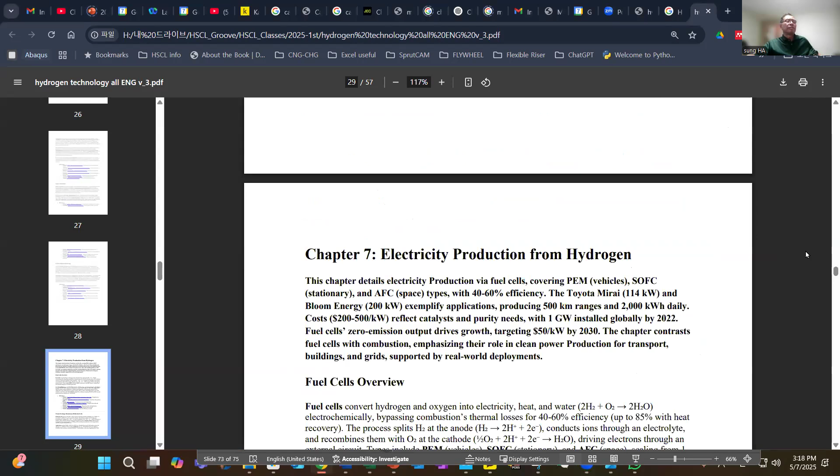Chapter 7 here, we actually list some key points: electricity production from hydrogen. As you can see here—oops, I'm sorry, I didn't share my screen. So chapter 7, electricity production from hydrogen—this is the topic we're gonna cover.

This chapter details electricity production via fuel cells. There can be several different types of fuel cells with different efficiencies. The Toyota Mirai has a fuel cell with a power of 114 kilowatts, among some examples, and cost is important.

And the fuel cell overview: basically there will be a conversion where hydrogen is combined with oxygen, and these are turned into electricity and a little bit of heat and water. Water is the output, along with H2 and O2, and electrochemically there are electrons that come out from this system.

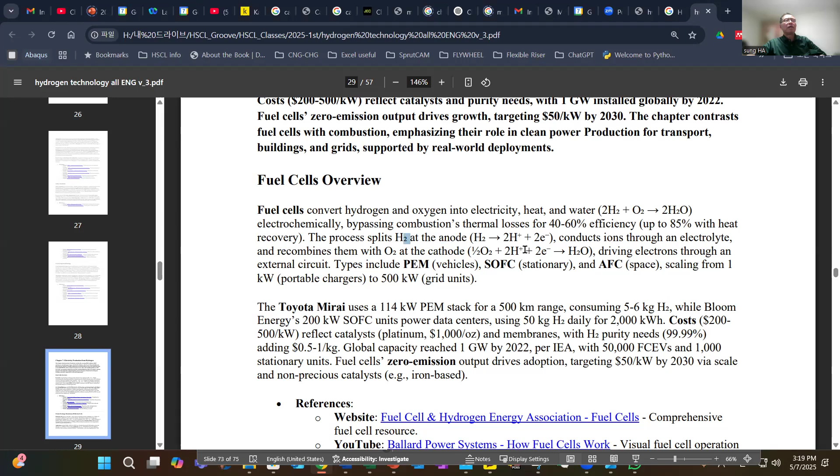What's happening is that in the anode—like in a battery or fuel cell, we always have an anode side and a cathode side—at the anode, H2 splits into 2 H-plus and 2 electrons, and conducts ions through the electrolyte. These two H-plus ions go through the electrolyte and through a membrane, then recombine with O2 at the cathode side. Then water comes out, and the two electrons go through some circuit, giving us energy as electricity.

So there could be different types, like PEM, SOFC, and AFC, but PEM is the most well-known type.

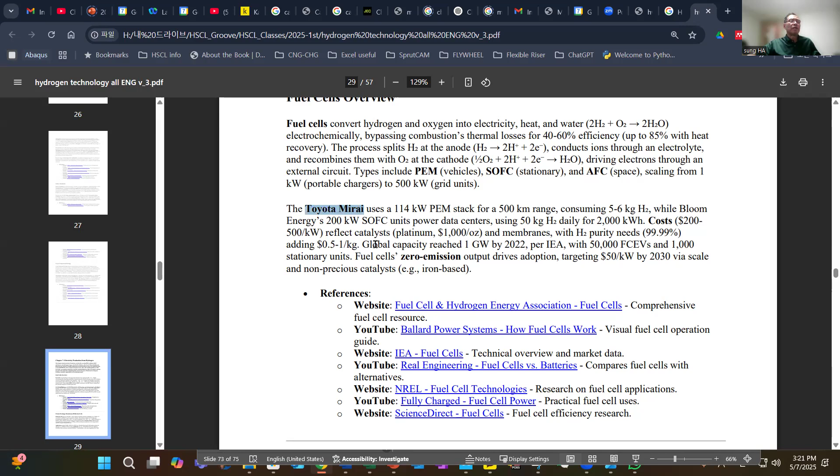Okay, well, there are some numbers which characterize the fuel cell of Toyota Mirai. The Toyota Mirai and Hyundai Nexo are the two most well-known fuel cell vehicles, so there are some good references.

So PEM, proton exchange membrane. A PEM fuel cell operates at not much high temperature, using a proton-conductive polymer membrane to shuttle H plus ions from anode to cathode with a platinum catalyst. This is important, the platinum catalyst. Without this, it's very difficult to split H2 into protons. The H2 needs to be accelerated in oxidation, and the O2 and H2 give us water.

And there's always an efficiency factor with current technology. The efficiency of current technology is about 40 to 60%. The efficiency is reaching higher and higher, but this is the reality right now.

And also, Hyundai has some fuel cell vehicles. Again, the driving range is important, about 600 kilometers or 700 kilometers. That's the one.

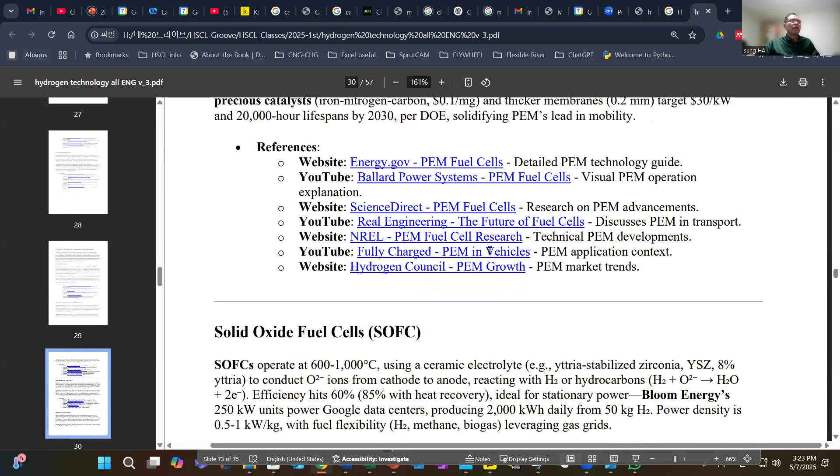Yeah, some numbers and explanations, and we need to understand this by going through some websites and YouTube. So today, let's watch some videos together, and then let's discuss.

I collected some hydrogen fuel cell YouTube videos.

Okay, well, there are already very good YouTube videos describing proton exchange membrane hydrogen fuel cells, electrochemical devices. Well, it's important to understand electrochemical device reactions. We're mostly mechanical engineers, but now we need to be well-trained, multidisciplinary, to understand a little bit about electrical and a little bit about chemical engineering.

This is critical to understand all kinds of energy. Energy conversion is mainly through electrochemical reactions, like a battery, which is also an electrochemical device. Anyhow, it combines hydrogen and oxygen to produce electricity with water and heat as byproducts. As you can see, water and heat are byproducts.

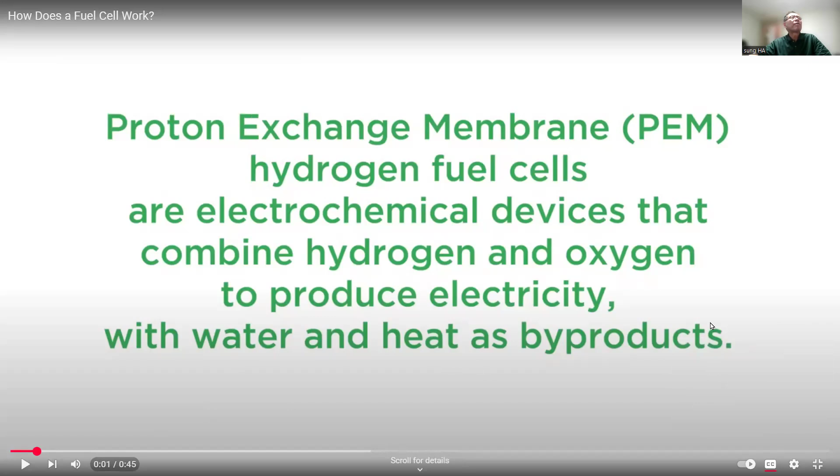We can turn the captions on. This is a very short video, but we have many different types of videos. As you can see, here is the H2 supply. As I just mentioned, there's a catalyst, platinum, which is very expensive. Then there's a proton exchange membrane, PEM, and then another catalyst. The H2 will split into H plus and electron and goes like this. We watched this video several times, but we cannot emphasize enough how important it is to understand these systems.

As you can see, hydrogen enters and is split, okay? This is split into protons and electrons. The electrons are shown in red color, and the proton is blue. They are split basically - that's what's happening on the anode side. And for this separation, again, the catalyst plays the most important role. There are a lot of researches going on to find effective catalysts instead of the expensive platinum. So once this is separated, it goes through the proton exchange membrane, PEM.

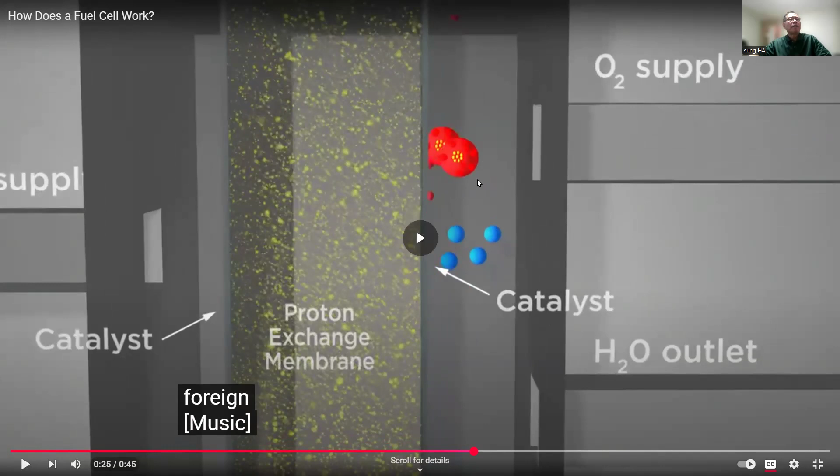So actually this is H plus, and then there's oxygen. Oxygen is just from the air, so it costs nothing. So basically the H plus and O2 combine. Okay, so what it does: H2 supply hydrogen from a hydrogen tank, and the catalyst splits the electron and the proton. So the electron now goes through and generates electricity, giving us energy. As you can see, the electron travels, and there is some heat generated - that's not avoidable, again affecting the efficiency. Then H2O finally will be a byproduct, H2O comes out.

So we always need to visualize this in mind - what's happening with the H2 in and H2O water comes out. This is the anode side and cathode side. Again, as you can see, this is the H plus proton traveling and meeting with the O2, giving us water. I'm repeating the behavior, but okay, this is how the fuel cell works. Very short video, but please keep that in mind, and we need to visualize that.

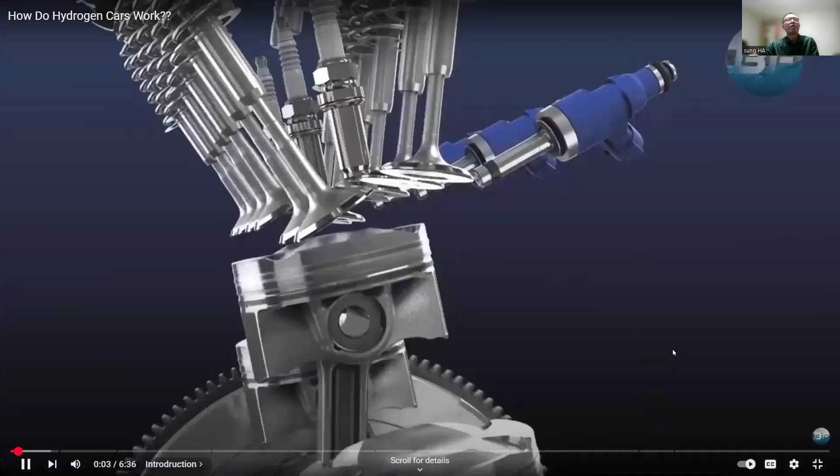Let's watch together: the function of a hydrogen vehicle. Have you ever wondered what powers a hydrogen vehicle and how it differs from traditional gasoline cars? In this video, we'll take a closer look at the different components that make up a hydrogen vehicle and how they work together to power the car. We will also discuss the benefits of hydrogen vehicles, such as their energy efficiency and environmental friendliness, as well as the problems that still need to be solved before they can be used widely.

First, let's take a deeper look into the differences between hydrogen cars using electric motors and combustion engines. Both types of vehicles use hydrogen as fuel, but the way they convert that fuel into power is different. A hydrogen car using an electric motor is known as a fuel cell electric vehicle, also called FCEV. In this type of vehicle, hydrogen gas is fed into the fuel cell stack, where it undergoes a chemical reaction with oxygen from the air to produce electricity.

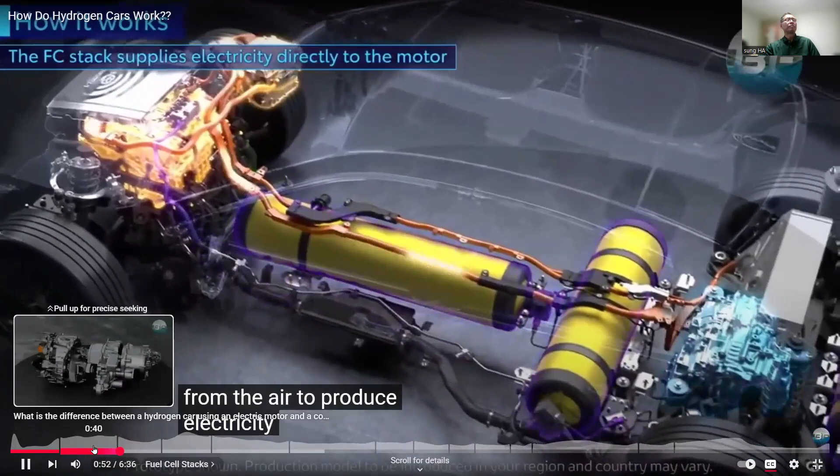Now this is the fuel cell, which we just reviewed what's going on inside. Actually, the H2 goes in there, and the O2 oxygen comes in together, and then some water comes out. Then electricity is generated, which is used to run the motor. It's fed into the fuel cell stack, where it undergoes a chemical reaction with oxygen in the air to produce electricity.

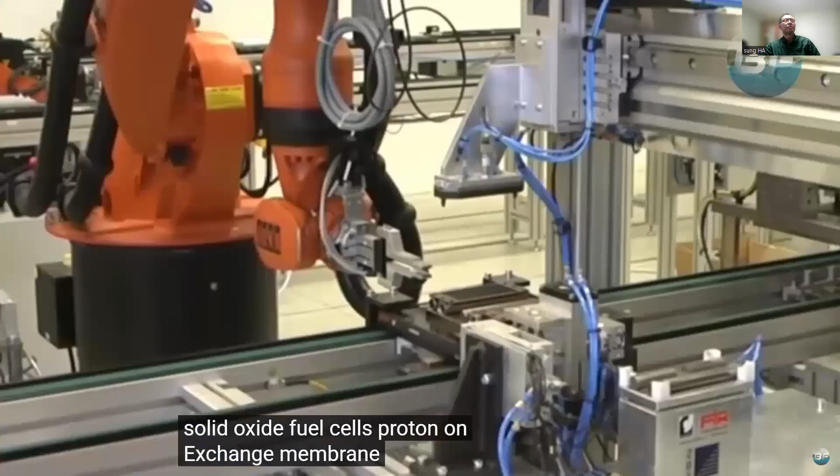There are a few types of fuel cell stacks. The most common ones are proton exchange membrane and solid oxide fuel cells. Proton exchange membrane fuel cells are typically used in cars because they can start up quickly and operate at low temperatures. Solid oxide fuel cells, on the other hand, are better suited for stationary power generation because they require high temperatures and operate efficiently. A fuel cell stack consists of multiple fuel cells which are stacked together.

Now this is the real stacked fuel cell. We just watched the one cell to understand what's going on, but this is a real one. So rather than a large thin layer, we stack them to have space efficiency.

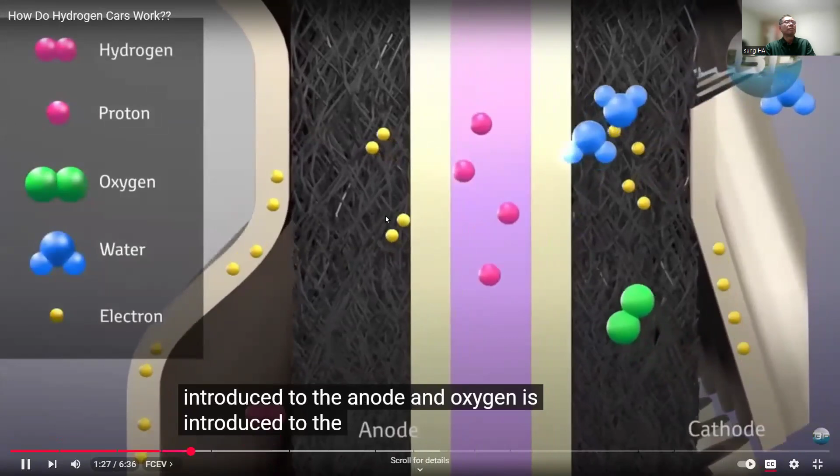Then the operation principle is basically the same as the one cell, just scaled up to increase the power together to increase the amount of electricity produced. Each fuel cell contains an anode, cathode, and an electrolyte. When hydrogen gas is introduced to the anode and oxygen is introduced to the cathode, a chemical reaction occurs, producing electricity. Electricity powers an electric motor that drives the car's wheels, with water being the only byproduct of the reaction.

A hydrogen car using a combustion engine is called a hydrogen internal combustion engine vehicle. In this type of vehicle, hydrogen gas is fed into an engine where it is mixed with air and ignited. The resulting explosion drives a piston, which turns a crankshaft and powers the car.

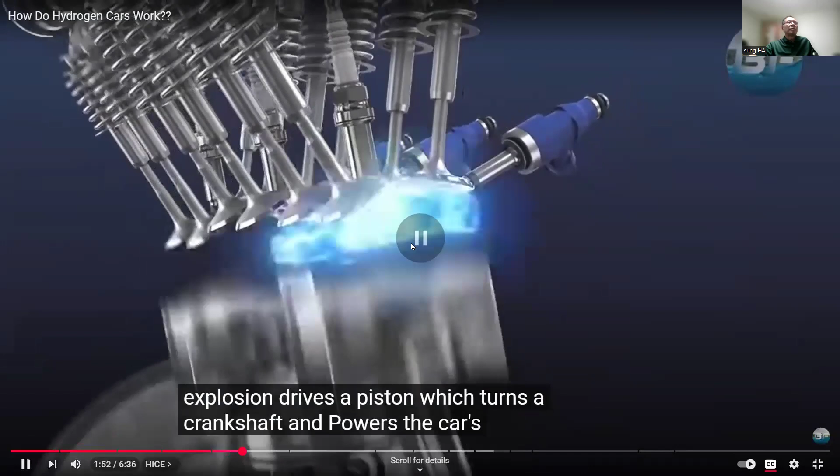Okay, this is a different explanation. As I mentioned, this is the hydrogen combustion engine, using hydrogen as a fuel similar to gasoline, because hydrogen gas itself can be flammable, so it can explode. This is just an internal combustion engine - instead of using gasoline, we can use hydrogen.

In this way, the biggest advantage is that we don't need any extra fuel cell system - we can use the existing conventional combustion engine. This combustion engine is, in principle, very similar to a conventional one, but with a little bit of minor modification. This technology is really led by Toyota - Toyota is developing this hydrogen combustion engine system.

However, hydrogen internal combustion engines emit pollutants such as nitrogen oxides and particulate matter, similar to gasoline-powered engines. Oh, and this hydrogen combustion engine produces byproducts; it generates not only water but also particulate matter, similar to gasoline-powered engines.

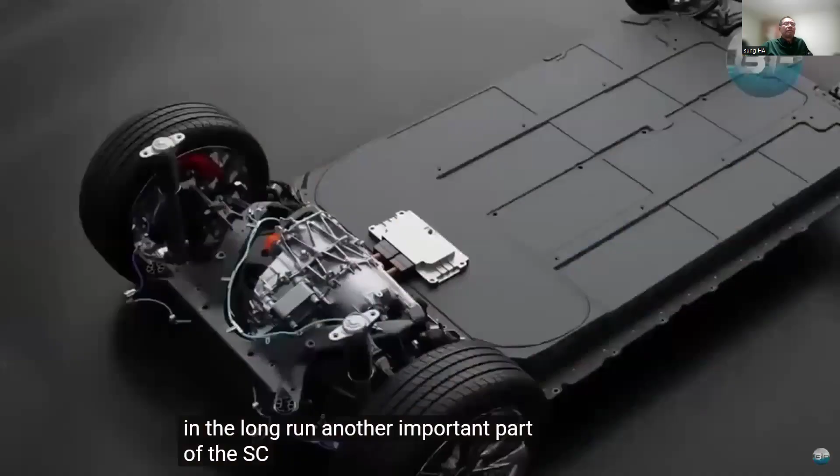However, fuel cell electric vehicles have an efficiency of 60%, which is 2 times higher than the efficiency of the combustion version. This means that fuel cell EVs require less hydrogen to travel the same distance, making them more cost-effective in the long run. Another important part of the FCEV is the electric motor. This is what converts the electricity produced by the fuel cell stack into mechanical energy that moves the car.

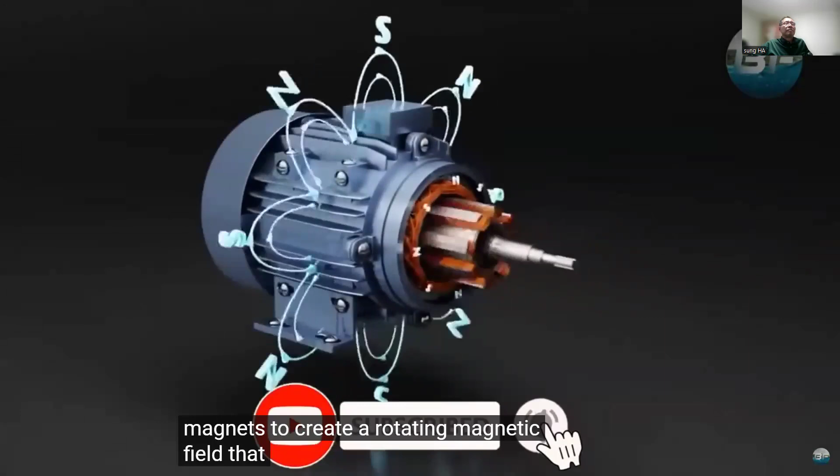There are 2 main types of electric motors used in fuel cell vehicles: the AC synchronous motor and the DC brushless motor. The main difference between these 2 types of motors is in the way they operate. The AC synchronous motor uses a set of magnets to create a rotating magnetic field that interacts with a set of coils to generate torque and turn the motor. The DC brushless motor, on the other hand, uses electronic commutation to switch the direction of the magnetic field and keep the motor turning. This makes the DC brushless motor more efficient than the AC synchronous motor, but also more complex to design and manufacture.

Next, we have the hydrogen storage tank. There are 2 main types of hydrogen storage tanks: compressed gas tanks and cryogenic liquid tanks. Compressed gas tanks are made of high-strength materials and are pressurized to store hydrogen gas. Cryogenic liquid tanks, on the other hand, store hydrogen as a liquid at extremely low temperatures.

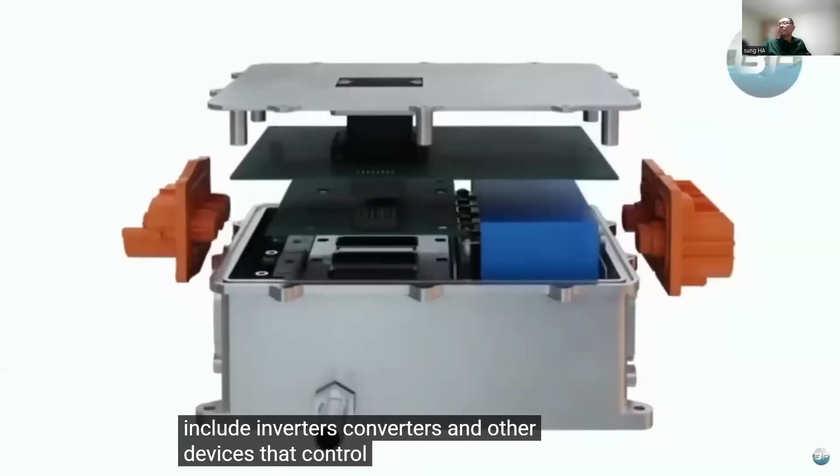Further components of a hydrogen vehicle are the power electronics, which manage the flow of electricity between the fuel cell stack and the electric motor. These electronics include inverters, converters, and other devices that control the voltage and current to ensure that the electric motor receives the right amount of power to operate efficiently. In addition, there is a cooling system that helps regulate the temperature of the fuel cell stack and other components. The cooling system uses a combination of air and water to maintain a safe operating temperature and prevent overheating.

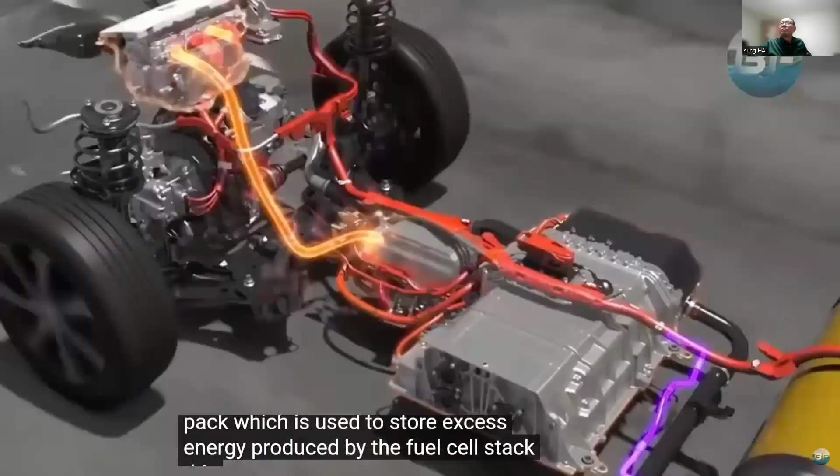Hydrogen vehicles also have a battery pack, which is used to store excess energy produced by the fuel cell stack. This excess energy can be used to power the electric motor during periods of high demand or to start the car in cold weather when the fuel cell stack may need additional time to warm up. Finally, the hydrogen vehicle has a number of safety features, including pressure relief devices and sensors that detect leaks or other potential hazards.

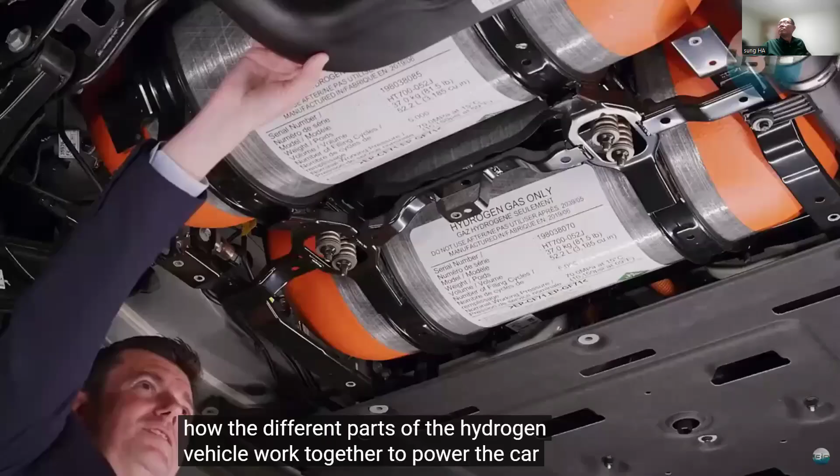Now let's take a closer look at how the different parts of the hydrogen vehicle work together to power the car. When the driver presses the accelerator pedal, the hydrogen gas is released from the tank and flows through a regulator valve, which controls the amount of hydrogen that is supplied to the fuel cell stack. In the fuel cell stack, the hydrogen gas is combined with oxygen from the air to produce electricity through a chemical reaction. The chemical reaction occurs at the anode of the fuel cell, where hydrogen molecules are split into positively charged hydrogen ions and negatively charged electrons.

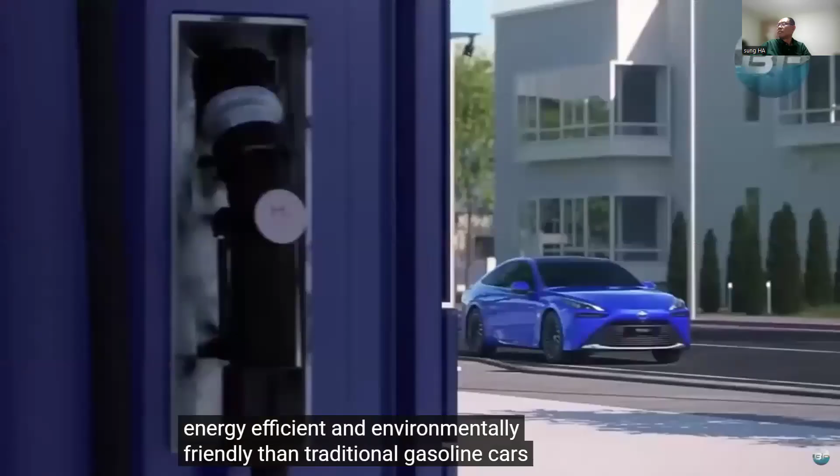The electricity generated from this chemical reaction is then sent to the electric motor, which converts the electricity into mechanical energy that powers the car's wheels. As the car moves, the only emission produced by the FCEV, as we said before, is water vapor, which is released from the tailpipe. This means that hydrogen-powered cars are not only more energy efficient and environmentally friendly than traditional gasoline cars, but they are also much quieter and produce less vibration.

One of the main concerns about hydrogen-powered vehicles is the cost of hydrogen fuel. Currently, producing hydrogen is more expensive than producing gasoline and diesel fuel. However, the cost of hydrogen is expected to decrease as more production facilities are built and economies of scale are achieved. There are also three types of hydrogen, which can affect the cost.

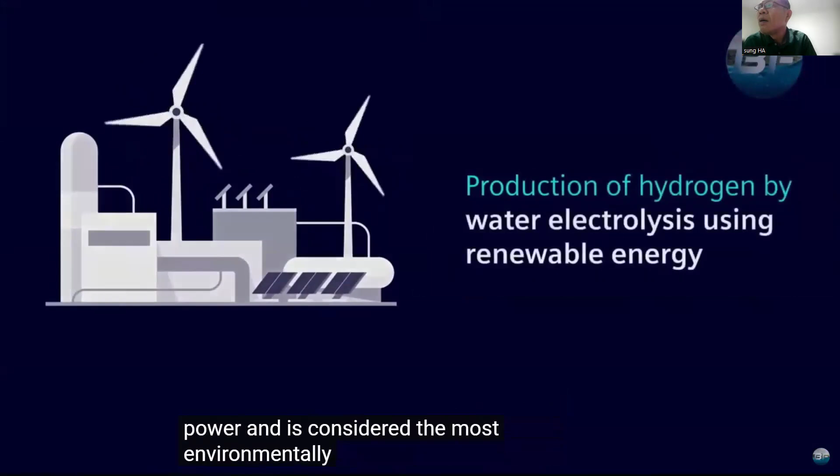Green hydrogen is produced using renewable energy sources, such as solar power, and is considered the most environmentally friendly choice. Blue hydrogen is produced using fossil fuels, with carbon emissions captured and stored, making it a cleaner alternative. Gray hydrogen is produced from natural gas through a process called steam methane reforming, which results in carbon dioxide emissions being released into the atmosphere. It is currently the most common method of hydrogen production and is also less expensive than green hydrogen.

In conclusion, hydrogen vehicles are a promising alternative to traditional gasoline-powered cars. The fuel cell stack, hydrogen storage tank, and electric motor work together to produce an energy-efficient and environmentally friendly mode of transportation. As we continue to move towards more sustainable and eco-friendly forms of transportation, hydrogen vehicles present a promising alternative that can help reduce our carbon footprint and create a more sustainable future.

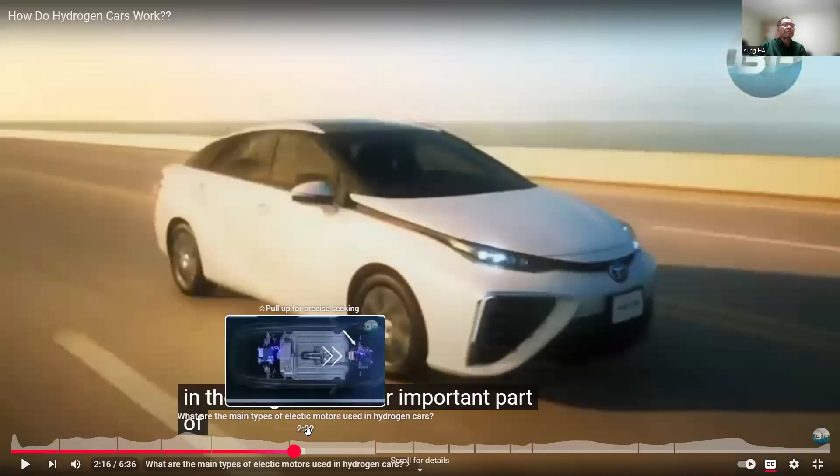Well, together with this fuel cell, which generates electricity, the next component is a motor. The motor is the real actuator to rotate the wheels and move the vehicle. Now, one of the main reasons why the EV, electric vehicle, got so popular is not just because of battery technology, but also

motor technology. So it is very critical to understand, not in detail, but basically how this motor system works. And here, this video introduces a little bit about the BLDC and also some other synchronous motor. Okay, let's go through.

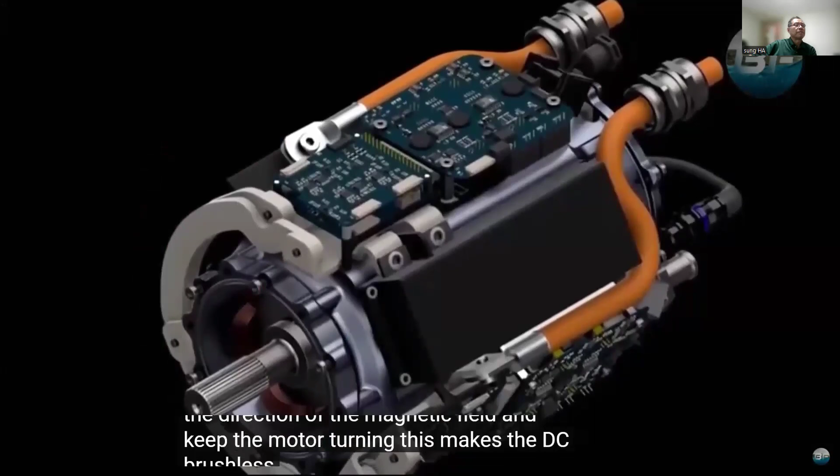Now this is the AC synchronous motor. Actually, this is a rotor and this is a stationary part, mostly consisting of the coils here. So basically, the most key point is the rotating part, which consists of permanent magnets. You know, recently the permanent magnet technology, material-wise, has improved a lot.

And one issue, still a big issue, is that this heavy magnet has to rotate at very high speed, like 2000 and 3000. Imagine this heavy magnet rotating. What will happen? Well, a lot of high centrifugal forces will be exerted on this magnet. And outside, as you can see, we have stationary coils. So to work as designed, one most critical point is to keep this heavy magnet in place. That is what we need.

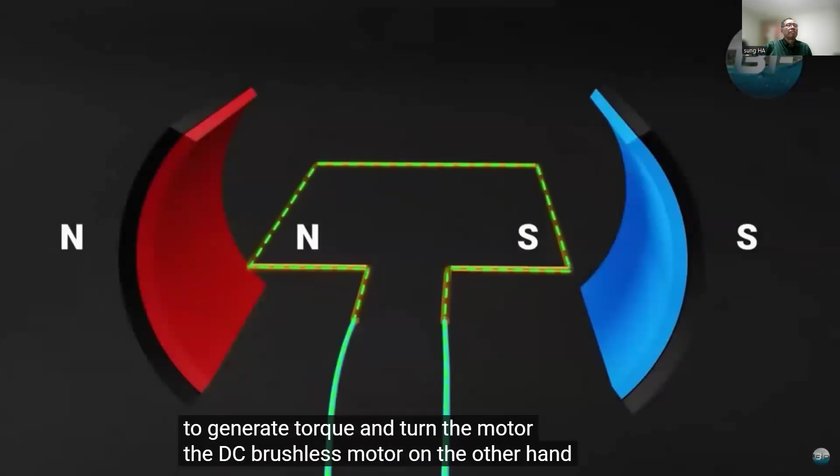Yes, with this brushless BLDC motor, efficiency-wise it could be higher, but this synchronous motor's efficiency is still over 90%, which is really a breakthrough, which makes these electric vehicles possible together with the battery. Now, even for hydrogen vehicles, we basically generate electricity from a fuel cell, and we still need to use this electric motor. So we pay attention to the technology of this electric motor.

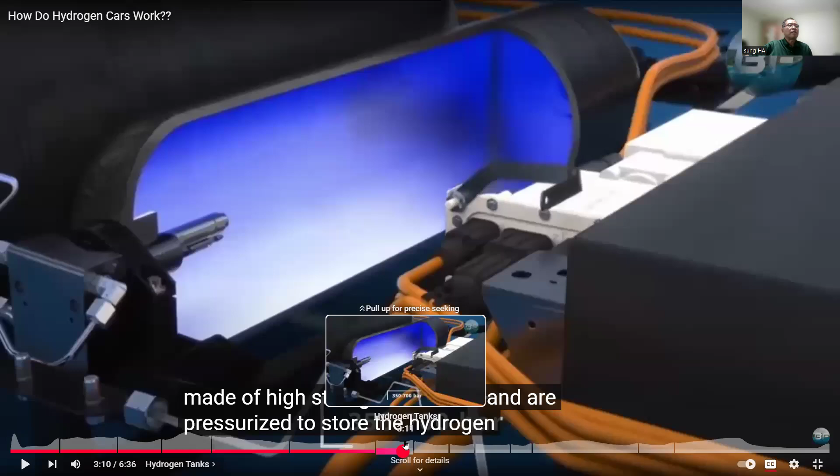So anyhow, what they are saying is that they get the hydrogen from the hydrogen tank, then the fuel cell, and the electricity goes into the motor. And as we already discussed, instead of high pressure gas, they could use very low temperature liquid hydrogen. But as we know, to keep hydrogen as a liquid, the temperature has to be really low, minus 253. That requires a lot of energy.

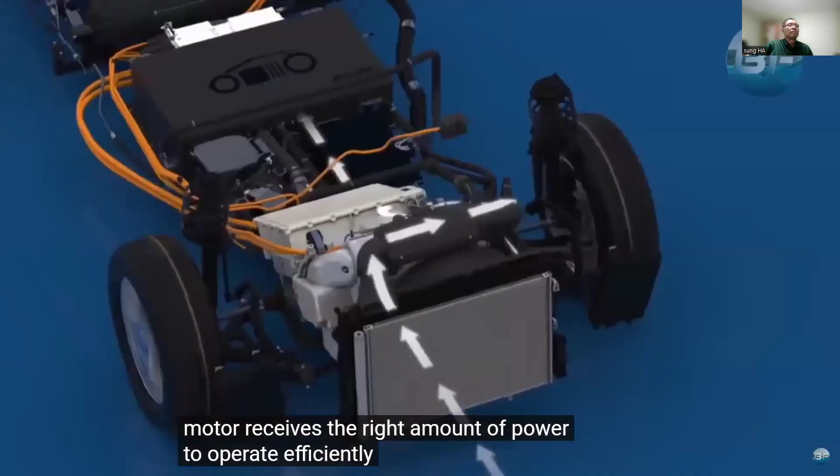Further components of a hydrogen vehicle are the power electronics, which manage the flow of electricity between the fuel cell stack and the electric motor. These electronics include inverters, converters, and other devices that control the voltage and current to ensure that the electric motor receives the right amount of power to operate efficiently. In addition, there is a cooling system that helps regulate the temperature of the fuel cell stack and other components. The cooling system uses a combination of air and water to maintain a safe temperature.

The cooling system is one of the key systems, in addition to the operation of the main system, like the fuel cell. From the fuel cell, of course, we get the electricity back, but there could be a lot of heat.

So we need heat management systems, a water cooling system, or just the free air cooling system as well, to maintain operating temperature and prevent overheating.

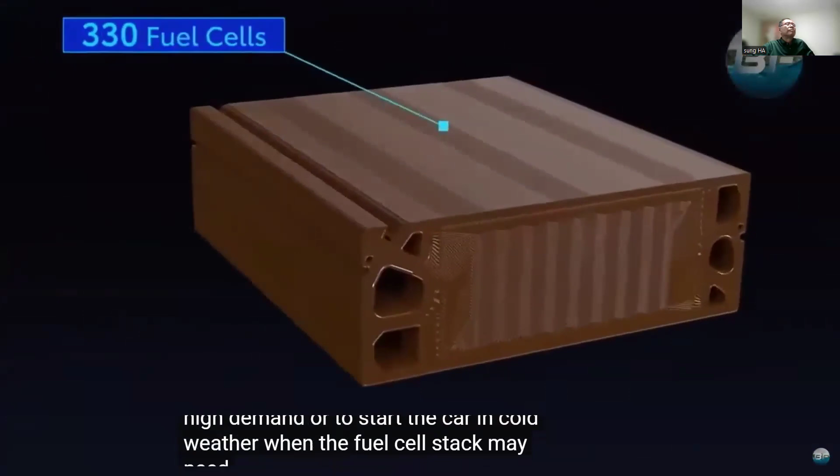Hydrogen vehicles also have a battery pack, which is used to store excess energy generated by the fuel cell. Oh, don't get confused. Even a hydrogen car needs a little bit of backup: the battery. Not as big as in a real electric vehicle, but a hydrogen car also needs a little bit of battery, which can play an important role. This excess energy can be used to power the electric motor during periods of high demand, or to start the car in cold weather when the fuel cell stack may need additional time to warm up.

Finally, the hydrogen vehicle has a number of safety features, including pressure relief devices and sensors that detect leaks or other potential hazards. Now let's take a closer look at how the different parts of the hydrogen vehicle work together to power the car. When the driver presses the accelerator pedal, the hydrogen gas is released from the tank and flows through a regulator valve, which controls the amount of hydrogen that is supplied to the fuel cell stack.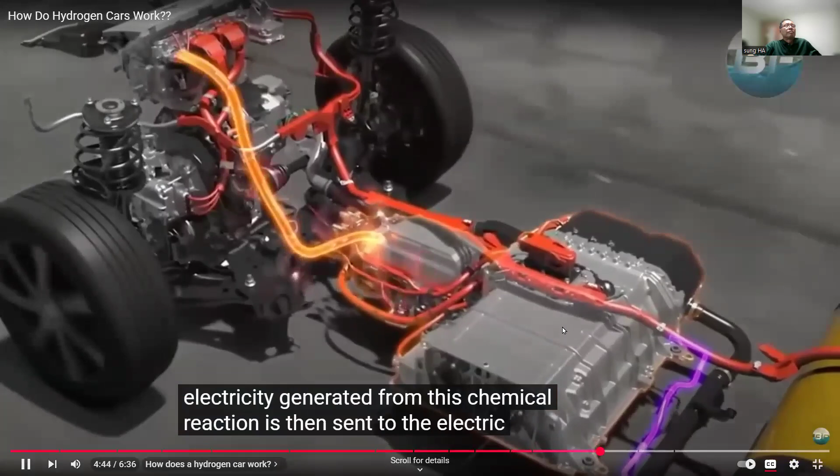In the fuel cell stack, the hydrogen gas is combined with oxygen from the air to produce electricity through a chemical reaction. The chemical reaction occurs at the anode of the fuel cell. Hydrogen molecules are split into positively charged hydrogen ions and negatively charged electrons. The electricity generated from this chemical reaction is then sent to the electric motor, which converts the electricity into mechanical energy that powers the car's wheels.

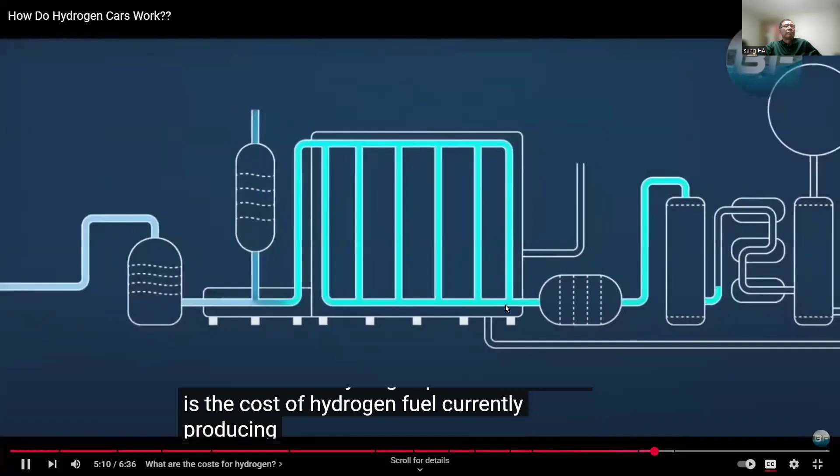As the car moves, the only emission produced by the FCV, as we said before, is water vapor, which is released from the tailpipe. This means that hydrogen-powered cars are not only more energy efficient and environmentally friendly than traditional gasoline cars, but they are also much quieter and produce less vibration. One of the main concerns about hydrogen-powered vehicles is the cost of hydrogen fuel. Currently, producing hydrogen is more expensive than producing gasoline or diesel fuel. However, the cost of hydrogen is expected to decrease as more production facilities are built and economies of scale are achieved. There are also three types of hydrogen, which can affect the cost.

Green hydrogen is produced using renewable energy sources, such as solar power, and is considered the most environmentally friendly choice. Blue hydrogen is produced using fossil fuels, but the carbon emissions are captured and stored, making it a cleaner alternative. Gray hydrogen is produced from natural gas through a process called steam methane reforming, which results in carbon dioxide emissions being released into the atmosphere. It is currently the most common method of hydrogen production and is also less expensive than green hydrogen.

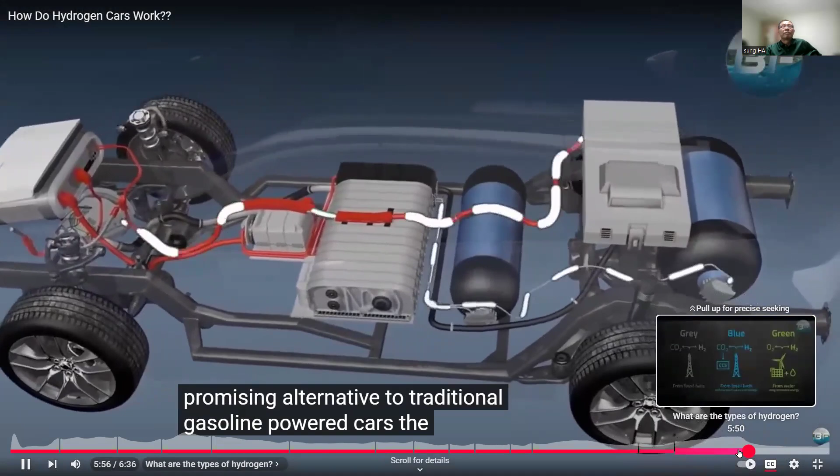In conclusion, hydrogen vehicles are a promising alternative to traditional gasoline-powered cars. The fuel cell stack, hydrogen storage tank, and electric motor work together to produce an energy-efficient and environmentally friendly mode of transportation. However, as we continue to move towards more sustainable and eco-friendly forms of transportation, hydrogen vehicles present a promising alternative that can help reduce our carbon footprint and create a more sustainable future.

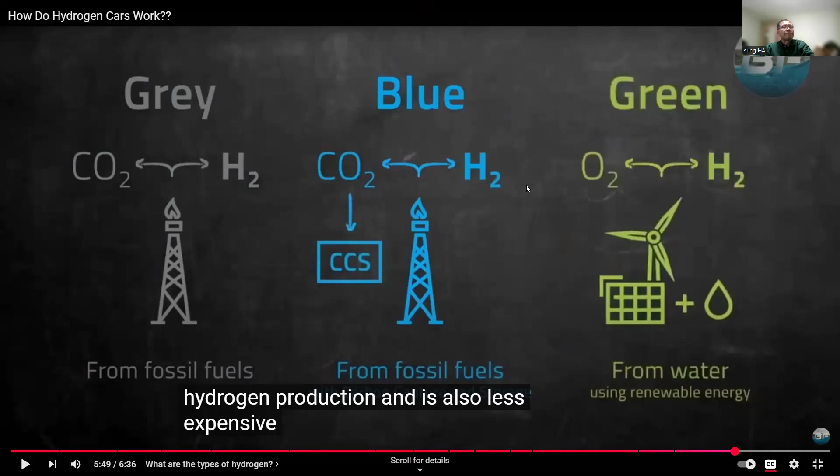So this is not so environmentally friendly. So basically, there are other colors like white and gold. And pink: pink is the electricity generated from nuclear power. There are so many colors, but basically it's important to understand these three most important ones. And so through this course, we'd like to get reminded of all the technology related to hydrogen. This hydrogen technology does not stand alone. They are placed all together.

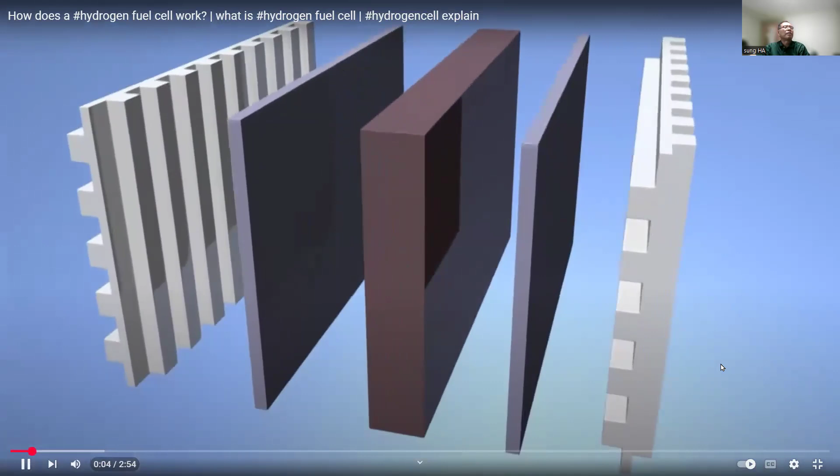Basically the PEM, but it is quite worthwhile to watch different videos and see this. It can be used for a wide range of applications, like transportation, material handling, backup power applications, etc. The conventional combustion-based technologies are presently used in vehicles and power plants. It is an opportunity for the fuel cell to provide its benefits.

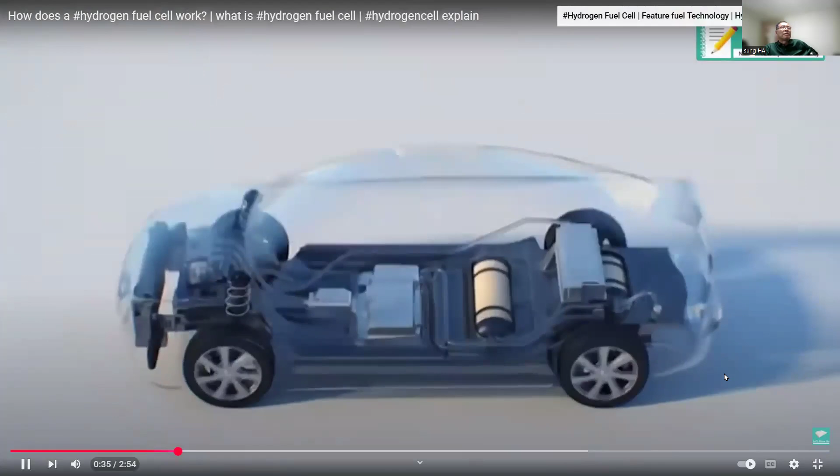Hydrogen is used to power fuel cell electric vehicles, FCEVs. It offers more efficiency over conventional engine vehicles as it produces no tailpipe emissions, but only emits warm air and water vapor. Let's learn how a hydrogen fuel cell works. Do you know how a battery works? Yes, fuel cells work like batteries, but they do not run down or need recharging. They can produce electricity constantly.

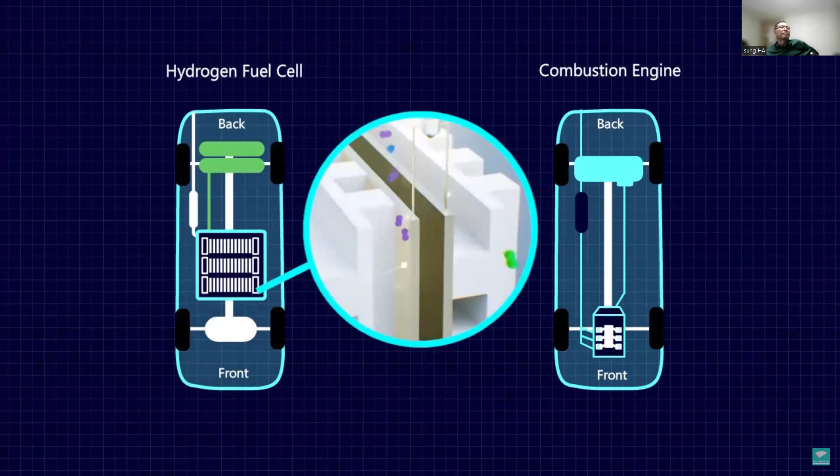Fuel cells operate at higher efficiencies than combustion engines, and they convert the chemical energy from the fuel to electrical energy. A fuel cell is composed of two plates separated by an electrolyte membrane. One plate is called the anode and the other is the cathode. Hydrogen is passed through the anode while oxygen is passed through the cathode.

Yeah, sometimes it's a confusing explanation, but again, the H2 comes into the anode side. Okay, this is the cathode side, where the H2, H+ and O2 combine, giving us the water. Okay, so this is the anode and cathode. At the anode, hydrogen molecules are split into electrons and protons by a catalyst.

The positive particle of hydrogen can pass through the membrane, but the negative particle cannot pass through it. However, atoms need an equalizing charge, and to achieve this, electrons must change their path. At that time, the electrons are forced through a circuit and generate electric current and heat. The end product of this reaction is water, H2O. At the cathode, the hydrogen protons, electrons, and oxygen combine to produce water molecules.

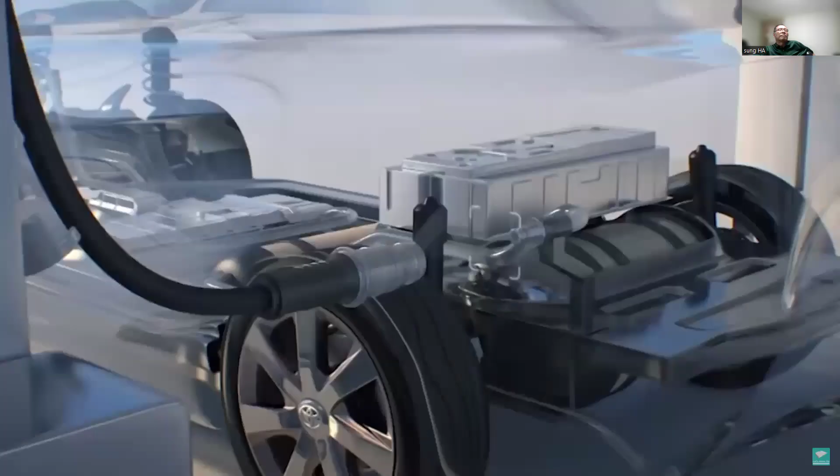Due to the lack of moving parts, the cells are highly reliable and their operation is silent. The hydrogen fuel cell is useful in the automobile industry also. Currently, there are several companies around the world working on the development of hydrogen cars. To learn more about the hydrogen fuel cell car, check out our next video.

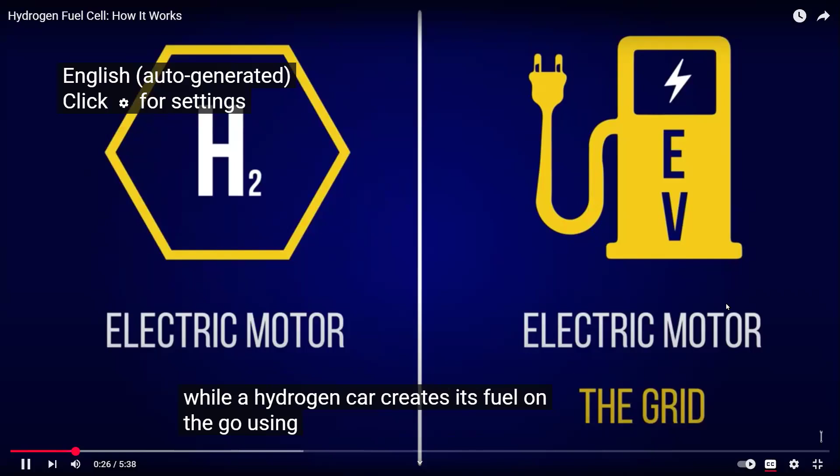However, one of the main differences is that an EV car gets its fuel from the grid. Now, as you can see, that electric motor, that electricity comes from the hydrogen, and the other electric motor's comes from the battery. But anyhow, which stores it in a sequence of lithium-ion batteries. Hydrogen supplies its fuel to what's known as the fuel cell. It's important to note that hydrogen itself is not a true fuel, rather a carrier of energy.

Okay, well, this concept was discussed in a very early class of this course. Hydrogen is not a true fuel, and instead it carries the energy. So we often call hydrogen an energy carrier made from other processes. We need to clearly understand this point. So hydrogen has a high potential energy, I would say.

So to be an energy carrier, we have to put the energy in; for example, we split the water and get the H2. To do so, we put in a lot of energy. So in terms of energy level, the H2 gets a high energy, and then when H2 is released into water, we can get the energy back. I hope that's clear. Okay, I'm gonna go through that.

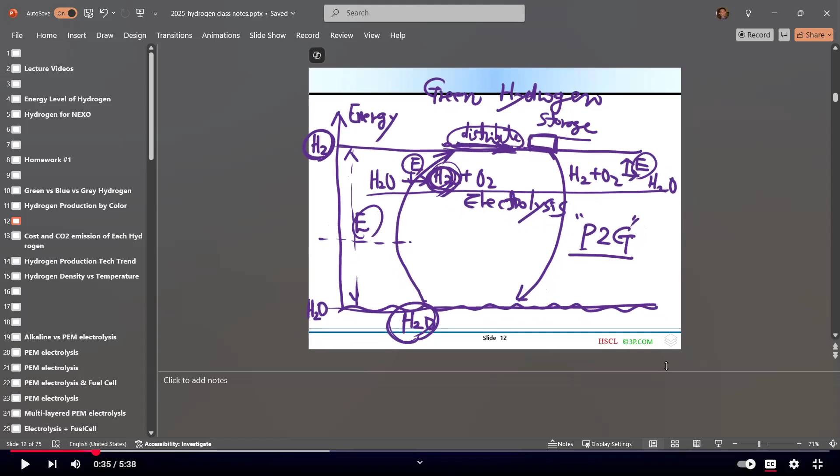It's similar to carrying the energies. And then whenever we need energy back, we add O2, H2 plus O2, and as a byproduct we're back to H2O, but there will be energy out. So the power to gas, this diagram shows the concept of the energy carrier, H2.

Okay, let's get back. So hydrogen is not a true fuel system. Instead, it carries energy made from other processes. Because the vast majority of hydrogen on Earth is trapped in water, processes such as chemical formation and electrolysis are needed to separate out the hydrogen. Hydrogen has an extremely low density in both gas and liquid states, and as such, it must first be compressed to up to 700 times atmospheric pressure.

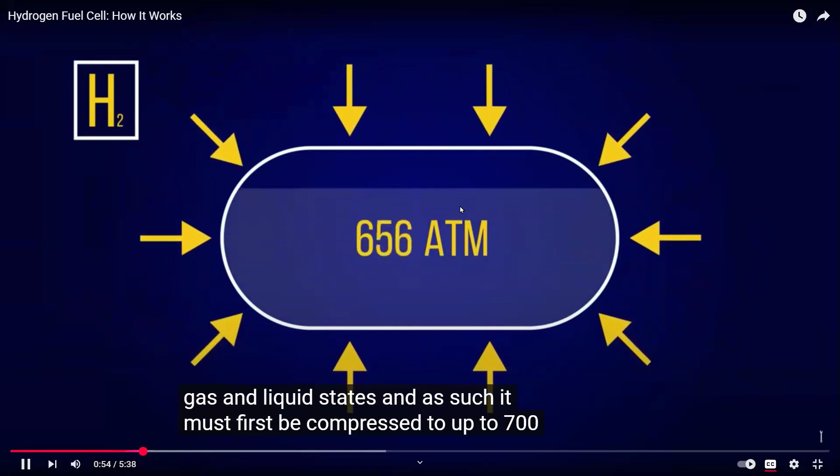And now it emphasizes that this hydrogen, which can be generated from electrolysis and the electrolyzer, H2 itself has a very low density. It takes too much volume to carry. So we have to have a high pressure to increase the density. This is the same topic we've been discussing so many times. So 700 bar is the common pressure, so that this can be well carried by one vehicle, and then driving range can be up to 700 kilometers. Adequate fuel density within the vehicle.

Furthermore, hydrogen is extremely flammable and explosive. Yeah, there are two keywords. The characteristics of hydrogen gas: very flammable and explosive. Well, explosive, what does it mean? Explosive mainly comes from the high pressure tank, not just the hydrogen itself. Now, hydrogen itself is flammable. Flammable means it very quickly reacts to fire. So flammable and explosive. That's why we need to develop further technology to carry it in a safe way. The storage tank must be stored and built to high tolerances to prevent leakage.

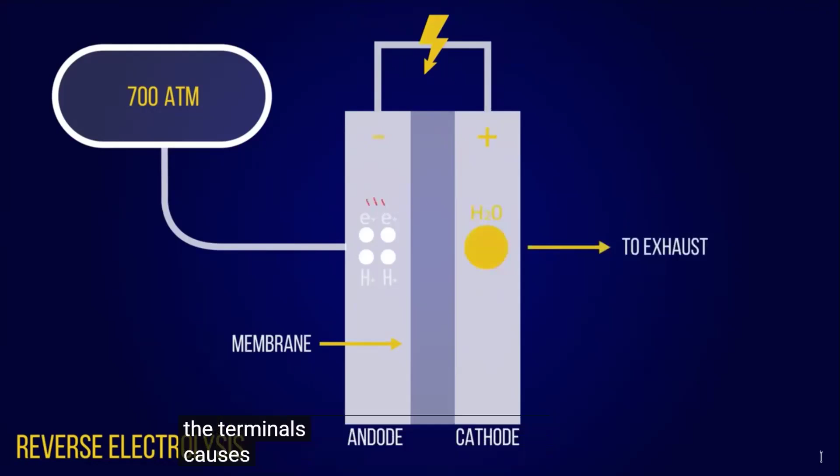This voltage difference between the terminals causes the electrons to follow an external circuit from anode to cathode, which creates an electric current. The DC current from this process must then be converted to AC by means of an inverter to power the electric motor. At the cathode, the hydrogen ions rejoin with the electrons, and together they combine with oxygen from the air, which creates a chemical reaction that produces water. This is the only byproduct from the process. The water is released as either steam or vapor to the vehicle's exhaust.

One fuel cell would not nearly provide enough electricity to power the vehicle. Therefore, multiple fuel cells are stacked in series with each other to account for this. Some hydrogen vehicles, such as the Toyota Mirai, also have an onboard battery which can store excess from the fuel cell. There are several YouTube videos and pictures, and they explain how this system works. But this very short video showing this figure, I think this is the most clear way of introducing the fuel cell.

This is the hydrogen tank, and this is the anode and cathode and the membrane system. And then this H+ proton travels. And then there is oxygen and exhaust, as water is the only byproduct. And now this one goes into an inverter and a motor system. This is always DC. Now we have an inverter, converting DC to AC. Now the AC synchronous motor will run. So this is giving us all about the hydrogen car.

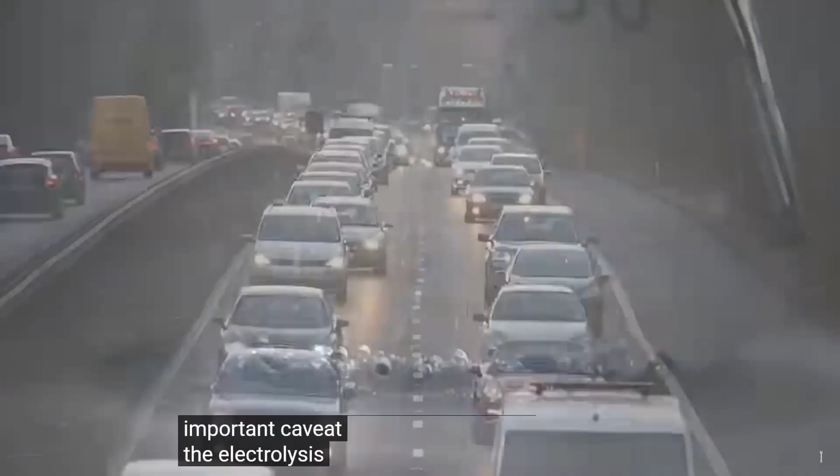Hydrogen also produces very few byproducts during use and can be considered an environmentally friendly fuel, with one important caveat: the electrolysis used to make hydrogen must be done using clean, renewable energy. Hydrogen cars are similar to EVs in this respect.

Now for the bad news. Fuel cell technology, in spite of all its promising benefits, is less than half as efficient as an electric vehicle when you take into account the entire energy chain of the vehicle.

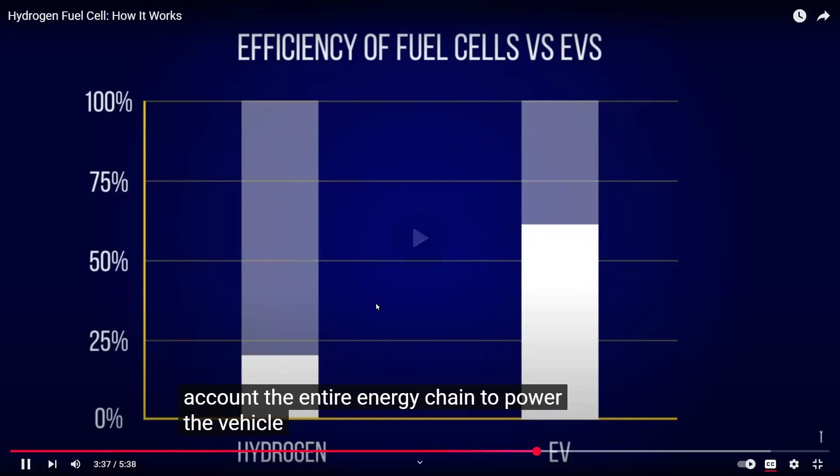Electrolysis, which is an inherently inefficient process, is needed to isolate hydrogen. It must then be compressed, transported, stored, and finally converted back into electricity to reverse electrolysis. With each of these processes comes an input and therefore an overall loss of efficiency. It is possible hydrogen could be produced and stored at the point of refueling so the transport element could be removed, yet there are still significant challenges remaining. The obvious question is, why wouldn't you just go down the more straightforward route and store that initial electricity in batteries?

Obvious. Okay, well, I would like to repeat what he says. This is the efficiency of a fuel cell. Let's say 100% means we have energy from a renewable source or any other source.

Now, to generate hydrogen, we use electrolysis, so there is an efficiency to generate the hydrogen. Now, if we have hydrogen, we need to compress it to increase to 700 bar, whatever, so there is the compression - we need some energy in. And then once that's stored into a hydrogen tank, it's now fed into a fuel cell, which will also have some efficiency - that is about how much efficiency will decrease. And then this hydrogen, the electricity from this fuel cell, drives the motor, and there is another motor efficiency and AC/DC conversion. So as you can see, as a result of starting from 100% of energy, now it's reduced to about 25% of energy back. This is the only energy we are using to run the electric fuel cell vehicles, unfortunately.

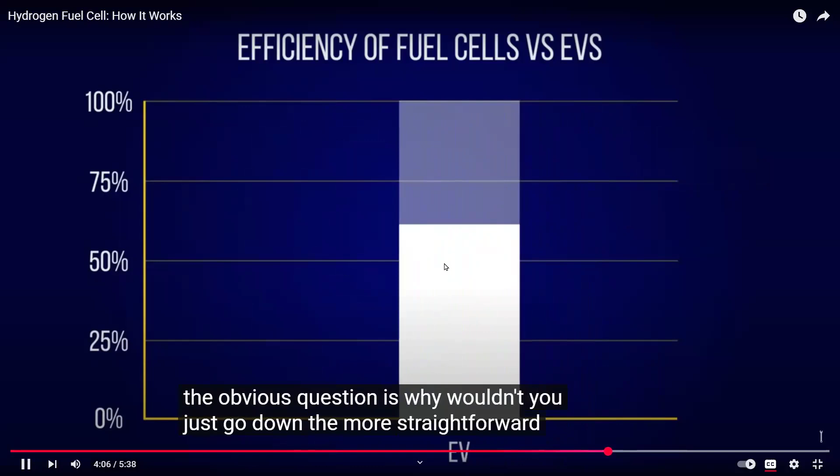This question is, why wouldn't you just go straightforwardly and store that initial electricity in batteries, as you would for an electric vehicle? The infrastructure for hydrogen is also much less developed than that of electric and gasoline, and it would take many years for the industry to catch up.

However, emerging companies such as Nikola plan to develop hydrogen transport networks for their fuel cell trucks along one of the most important supply routes in the United States. Over time, this may help to scale their operations to a greater customer base.

The high cost of buying a hydrogen car today is still unattractive for most people, where an equivalent EV can be picked up at almost half the price. The reason behind this is the associated cost with platinum, which is used as a catalyst in fuel cells. Hydrogen fuel is also expensive and comes at a much higher price per kilometer than both gasoline and EVs.

In spite of all its flaws, perhaps hydrogen does have a future in larger modes of transport, where its counterpart is limited by the weight of its bulky lithium-ion batteries. Or perhaps it's just an expensive distraction where more brain power could be channeled into refining EVs or developing more efficient technologies. Nobody is certain what the future holds with all the growing possibilities in this industry. Petroleum will undoubtedly play a much smaller part in our daily lives, and the sooner we embrace a world powered by these alternative clean energy technologies, the better.

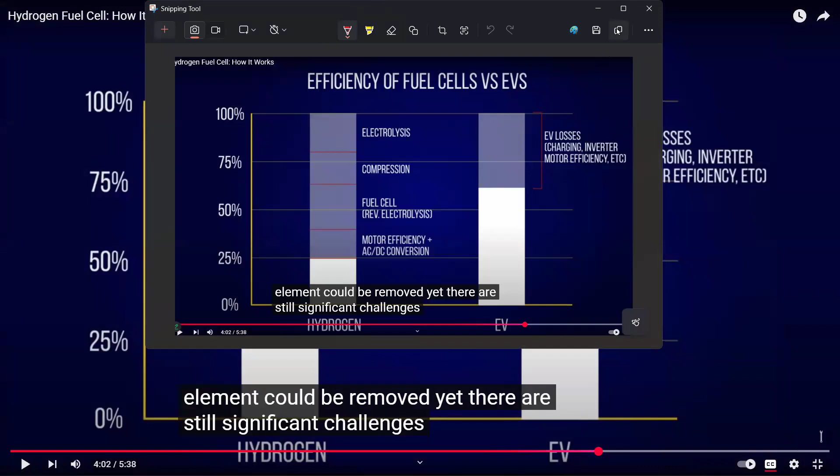Okay, as I mentioned, I liked this video. It touched all kinds of aspects of hydrogen vehicles compared with electric vehicles, and we need to clarify the efficiency of the hydrogen car compared with electric vehicles. And then this needs to be well understood. Clarifying the problem is the starting point of solving the problems.

We cannot avoid this fact. So again, it's very important to understand why there is some barrier we have to overcome.

Even with this very inefficient way of energy conversion in hydrogen compared to electric cars, electric cars still have the issue of slow charging, even though there are recent developments of quick charging, like 10-minute or 1-hour charging. But that causes another risk of fire.

And recycling of batteries is a big issue, and rare materials such as nickel, chrome increase the risk. Of course, there are a lot of different technologies other than lithium-ion battery, like sodium - so many different technologies are coming out to solve the problems associated with batteries.

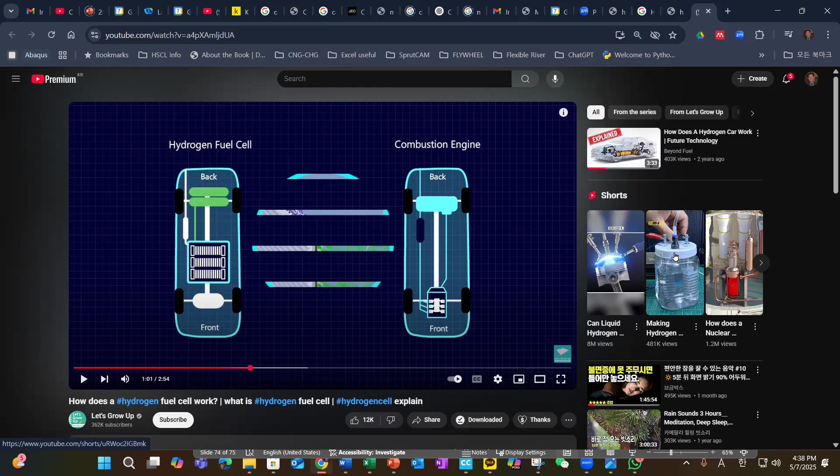Now the next one is hydrogen combustion, which is a very promising engine system. The hydrogen can be used not just for the fuel cell, but for making hydrogen combustion work. Let's watch this video showing the hydrogen combustion system.

What does it mean, hydrogen combustion? Well, rather than this one, I'd like to go through more.

Okay, well this is very lengthy - the hydrogen combustion system. I don't want to go in detail, but we need to understand what kind of technology is used, for large vehicles and large trucks and everything.

So okay, this is a webinar covering the hydrogen combustion system. I'd like to emphasize that there are a lot of activities going on to use hydrogen as a combustion fuel, as I mentioned, hydrogen combustion.

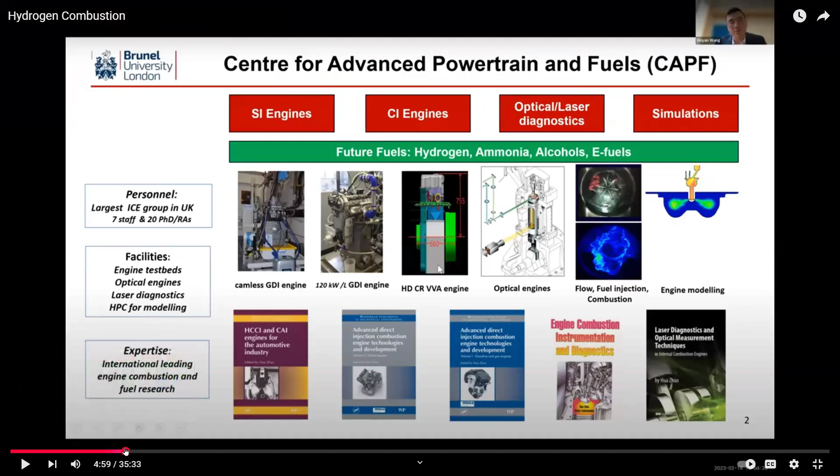Well, it covers a lot of details, the business aspects and the challenge and opportunity moving toward net zero. Again, as we just reviewed the problems associated with the fuel cell, now how do we get rid of a fuel cell? Well, we could just use combustion engines, and that can be one way.

And Toyota saved the combustion engine. They're one of very few companies to develop a liquid hydrogen engine. That means all the noise and excitement of a combustion engine, yet almost no carbon emissions. It's mostly just water coming out of the exhaust.

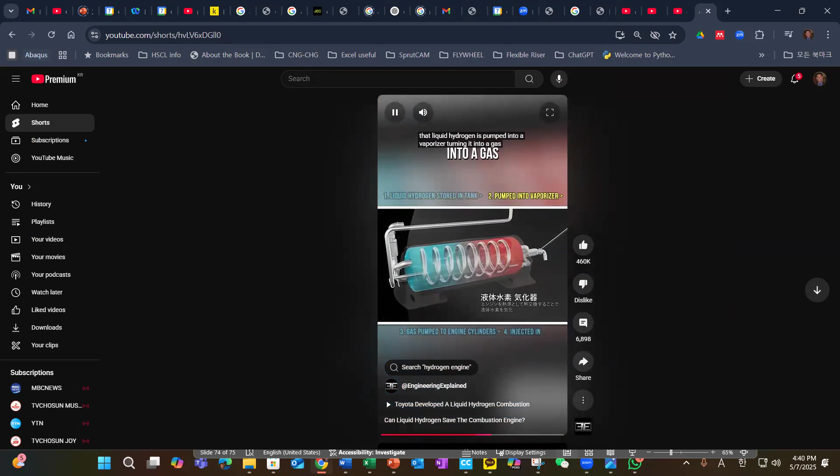How does it work? Liquid hydrogen is stored in a tank at negative 253 degrees Celsius. Using a liquid is super beneficial because it means you can store about 75% more hydrogen in the same space versus a compressed gas. That liquid hydrogen is pumped into a vaporizer, turning it into a gas, where it eventually is pumped all the way to the engine cylinders, injected in and operating much like a gasoline engine would.

That all sounds lovely, right? And it is technically possible, but some huge challenges mean we'll likely never see this in production cars. Why not? If only there was a video deep diving into the details. Oh well, next.

Toyota and the hydrogen... hydrogen combustion engine system.

Again, Toyota is exploring, Toyota is leading this technology, exploring the hydrogen combustion engine. It's just a combustion engine, but they're using hydrogen as the fuel. So it can be very simple. We don't need a fuel cell, we don't need other systems like the battery. We just need an engine and hydrogen.

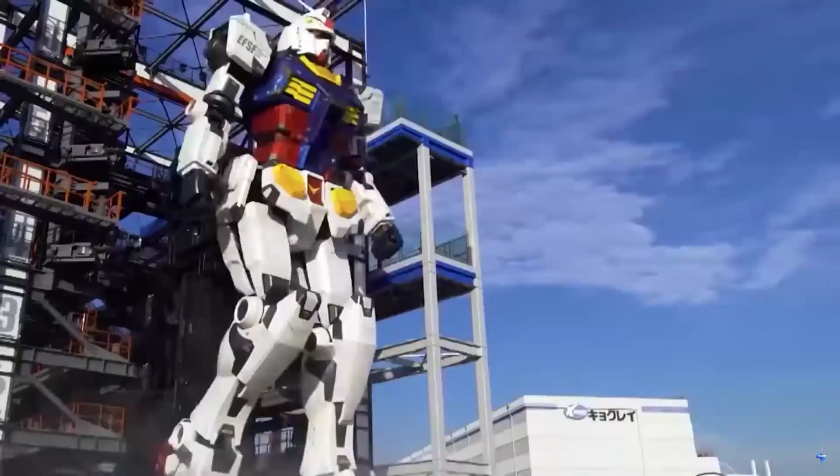Join us and buckle up for a new way of thinking as we discover how Japan will redefine how we think about transportation. Of course, the Prime Minister is talking about Toyota, which has been experiencing a brand renaissance over the past few months. The company, which has always been one of the most popular car manufacturers globally, has extensively modified and updated its entire range of vehicles and options to significantly boost its brand image and rival other, much younger and quirkier brands, notably Tesla.

Toyota's uninspired brand image stems from the actions of its former CEO, Akio Toyoda. While a capable leader, Toyoda considerably stifled Toyota's potential by prioritizing reliability over vehicle design, quality, enjoyment, and most critically, innovation. This company's strategy made sense 20 years ago. However, in the current market, remaining conservative would essentially lead to Toyota's inevitable demise. That is why Toyoda stepped down in favor of Koji Sato, the former president of Lexus and Gazoo Racing, Toyota's motorsport division. Who do you prefer, Koji Sato or Akio Toyoda?

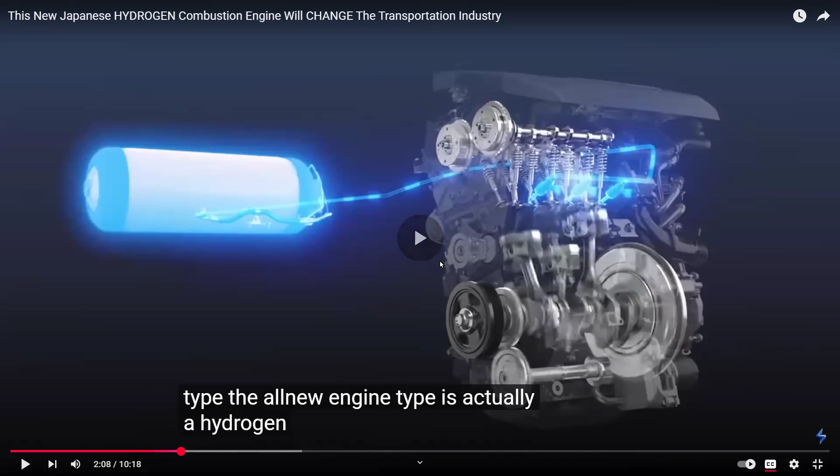Hydrogen-powered engine. However, we're not referring to FCEVs like the Toyota Mirai, or EVs that use hydrogen fuel cells. No, the engine we're discussing is an internal combustion engine that utilizes hydrogen as fuel. This is big news, as it will allow Toyota to achieve its goal of zero emissions and, in the long term, become the cleanest car manufacturer in the world.

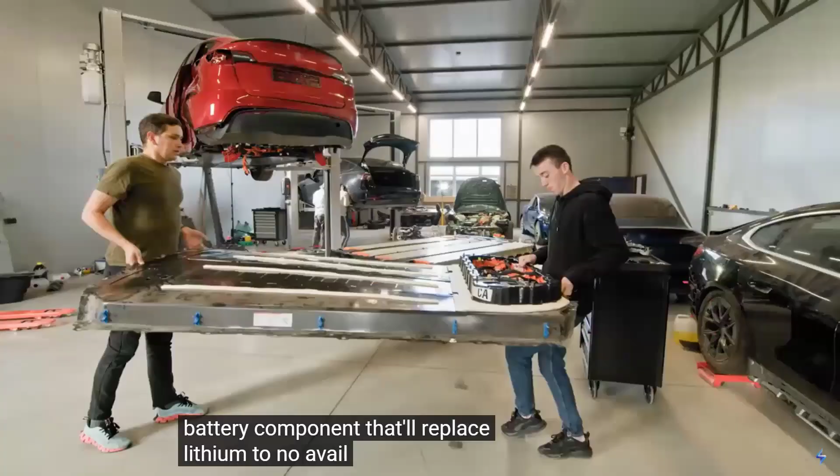As we all know, EVs and FCEVs require a lithium-ion battery pack, which requires huge quantities of lithium to be mined. Lithium is extremely expensive, and mining it is a very dirty business. Unfortunately, many car manufacturers have been searching for a completely new battery component that will replace lithium to no avail, as these other battery types are far less efficient than lithium-ion ones.

Oh, and let's not forget that Toyota's own EV, the bZ4X, isn't selling very well. Until recently, Toyota didn't want to enter the EV segment at all, giving its competitors a head start on conquering the market. Additionally, despite all their technological advancements, EVs remain impractical for many individuals, as their maximum range often falls short, particularly when considering the very long charging times.

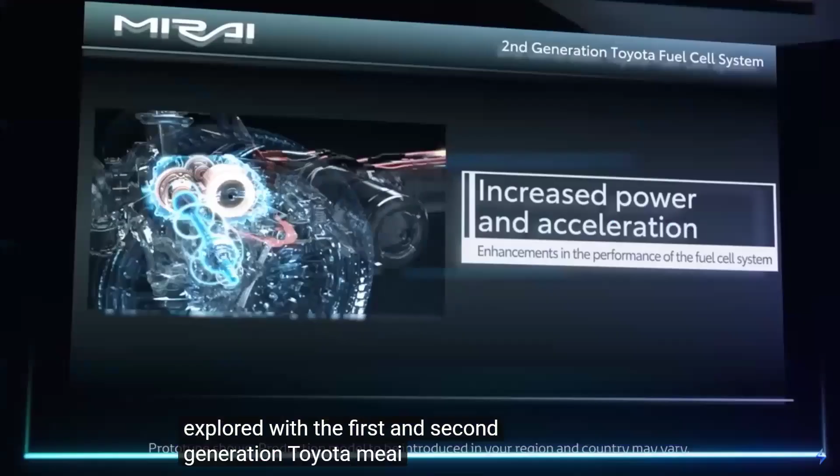This is why Toyota is set on finding an alternative to electric vehicles in general, and going the way of hydrogen, which they already explored with the first and second generation Toyota Mirai, was most definitely the way to go. Hydrogen is the most abundant element in the entire universe, and using it instead of anything else, especially fossil fuels and lithium, would be one of the best ecological and economic decisions ever. Seriously, cars would be cheaper to buy than regular petrol-powered vehicles, and cheaper to run than EVs.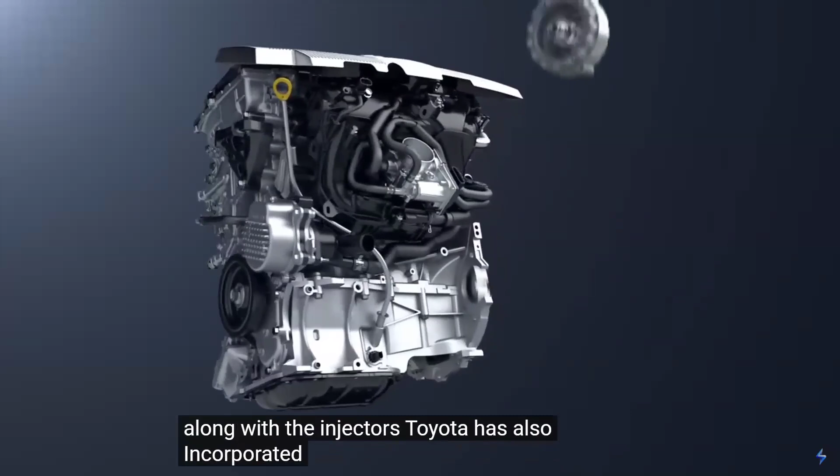Hydrogen is a gas, not a liquid, and requires an extremely robust and virtually bulletproof tank for storage to prevent escape, as it is highly flammable. Additionally, since hydrogen isn't in liquid form, the engine needed completely reworked fuel injectors designed for gas rather than liquid. Along with the injectors, Toyota has also incorporated considerably hardened valves and valve seats, as well as much stronger connecting rods that can withstand the cylinder pressure necessary for hydrogen.

This resulted in an engine that could withstand continuous torture without breaking down, and was as reliable as its more conventional counterpart. So, in essence, it was bulletproof. Hey, what did you expect? We're talking about Toyota here.

To make matters even better, Toyota has also announced the development of even more hydrogen-powered internal combustion engines. The most notable of these will be a naturally aspirated 5.0 V8, which will be used as a workhorse engine in trucks, SUVs, and, when tweaked and finely tuned, even sports cars. Its projected power output will be over 450 horsepower.

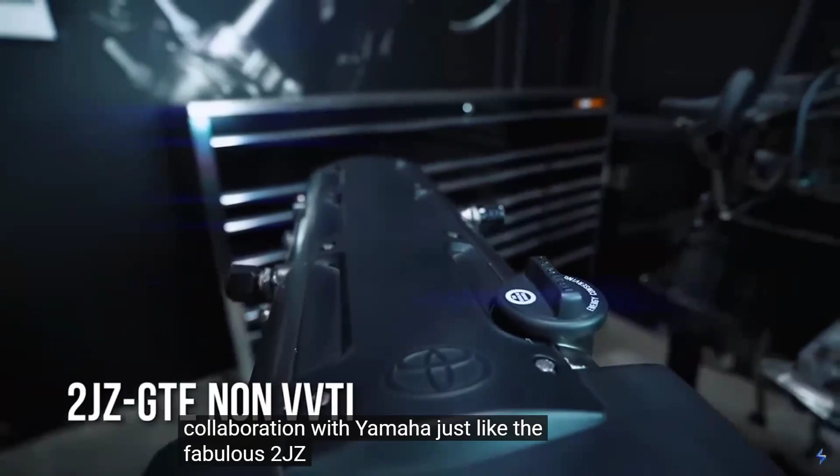Oh, and the cherry on top is that this engine will be developed in collaboration with Yamaha, just like the fabulous 2JZ from the old Supra, and that beastly 4.8 V10 found in the Lexus LFA. We're pretty darn sure the upcoming V8 will be a blast. We can't wait to see these engines being utilized in real life, which leads us to the next question. When will these engines get officially adopted?

Well, they are technically already adopted, at least the 1.6 one. Toyota fitted the engine to a Yaris GR and even a Corolla Cross as soon as it was developed. These cars are called the Toyota Yaris GR H2 and the Toyota Corolla Cross H2.

Oh, and don't worry, these cars aren't gutless, as the reworked engine managed to put out similar levels of power and torque as the petrol-powered cousin, making these cars actually daily usable and fun. To add to the fun factor, the noise coming from the back is also fabulous, as the car sounds just as good as the petrol-powered alternative.

Can't wait to hear what a low-revving torque monster of a V8 will do. Speaking of which, the V8 is expected to be fully developed in about a year, which means that we'll be hearing, pun unintended, about it very soon. Granted, the previously mentioned cars are just prototypes that won't see any real use. However, the creme de la creme is that Toyota projects that fully functional hydrogen combustion vehicles will hit the market by the end of the decade.

Honestly, we're absolutely thrilled that EVs are finally getting a true competitor in terms of green energy and overall efficiency. We cannot emphasize enough how pleased we are that internal combustion engines aren't going the way of the dodo just yet. We're eager to start seeing and hearing them on the streets. That is, if we ever get the chance.

You see, the Inline 3 and the V8 began development during Akio Toyoda's tenure, who was keen on keeping internal combustion engines as the primary way of powering vehicles. Koji Sato is, unlike his predecessor, much more focused on developing EVs, as he believes they offer numerous benefits over traditional internal combustion engines. In fact, he's so committed to modernizing Toyota that he announced the company will introduce over 10 completely new EV models by 2026, which is music to our ears, especially considering their extremely late start.

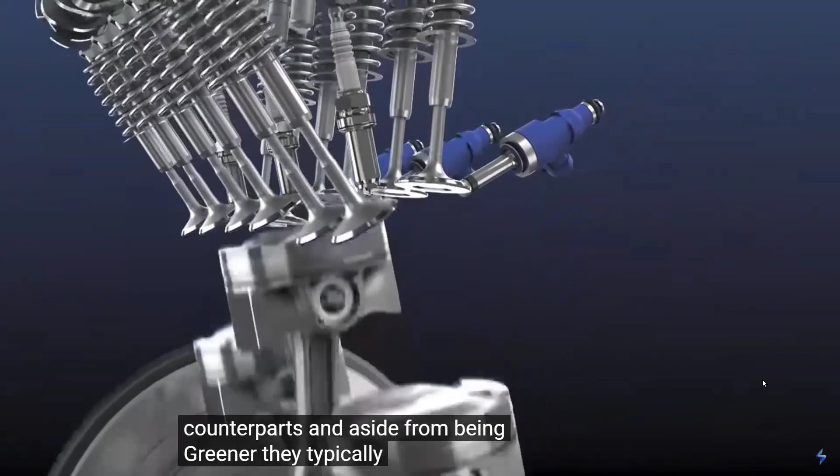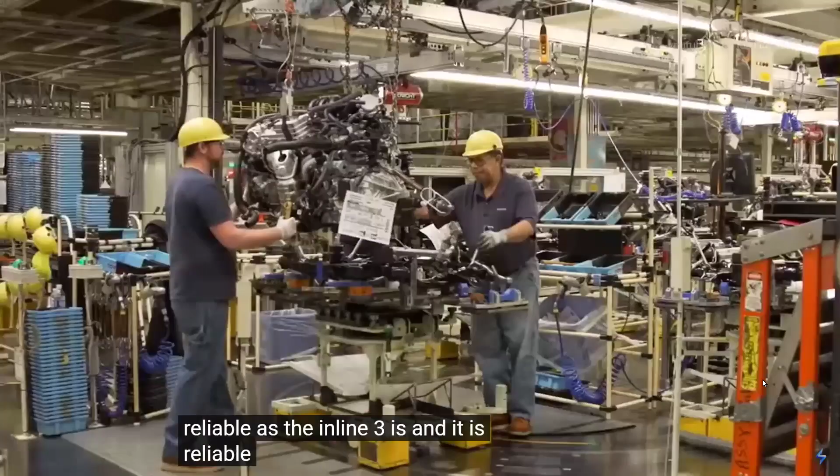On the other hand, as reliable as the inline 3 is, and it is reliable, it remains a complex mechanical assembly with numerous components that could easily break down and significantly impact its reliability. This means maintenance will be quite expensive, notably more so than for hydrogen fuel cell EVs like the Toyota Mirai. Additionally, FCEVs provide a much larger range than hydrogen internal combustion engine vehicles and are similarly quick to recharge, making them a more rational option than the admittedly much cooler internal combustion powered vehicles.

Oh, and even though hydrogen is plentiful, it still needs to be converted for regular use, which requires a lot of energy. Because it is extremely hard to convert, there will be many conversion losses, making hydrogen dirty to produce. Storing hydrogen is also extremely challenging. Not only is hydrogen flammable, but it can also be explosive under certain conditions, making it particularly finicky to store. It tends to leak due to its small molecular size, which is why armored tanks are necessary to keep it as safe as possible. Unfortunately, storing hydrogen in vehicles is just one of its problems. Storing it outside the vehicle presents an even bigger challenge. It requires constant cooling, monitoring, and careful handling, resulting in significant inefficiencies in the long run.

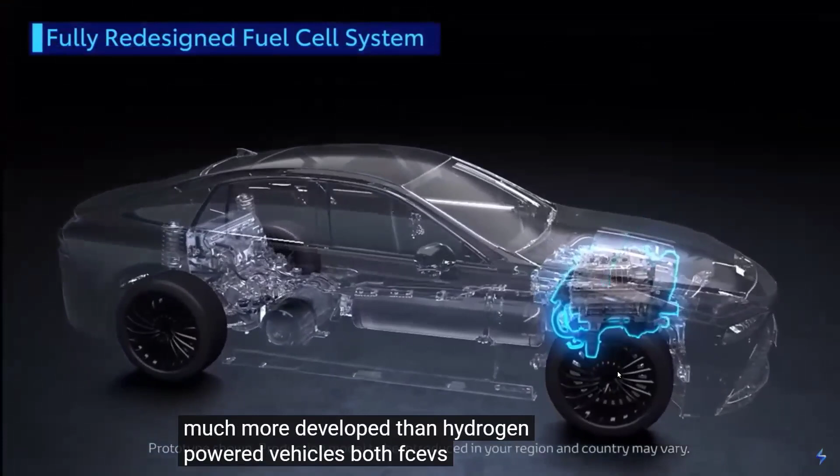To save yourself the hassle, simply go and buy an EV, at least for now. They are quicker, more common, and because of their popularity, considerably more convenient to charge. Yes, we know lithium-ion batteries are also prone to catching fire, and mining them is dirty for the environment. However, they're still far greener than hydrogen because they're much more developed than hydrogen-powered vehicles, both FCEVs and hydrogen combustion ones. That doesn't mean you should give up on hydrogen, though.

No, hydrogen is definitely the way of the future. It just needs a lot of refining before it becomes a viable choice for regular users. That's why companies like Toyota and BMW continue to nurture the technology, even though it's completely unprofitable. The relationship between electric vehicles and hydrogen-powered vehicles is essentially the same as that between traditional vehicles and electric vehicles a couple of decades ago.

Overall, we genuinely believe that hydrogen is the future. However, we regret to announce that we are not yet in the age of hydrogen vehicles. Until we address these significant issues and inconveniences, we will need to move away from hydrogen combustion vehicles. However, we are in the age of EVs, and we're pleased that the entire industry is looking for an alternative to lithium to create a more environmentally friendly battery. Believe it or not, Toyota is actually leading the charge with its all-new battery type, which doesn't use lithium or any other rare element at all.

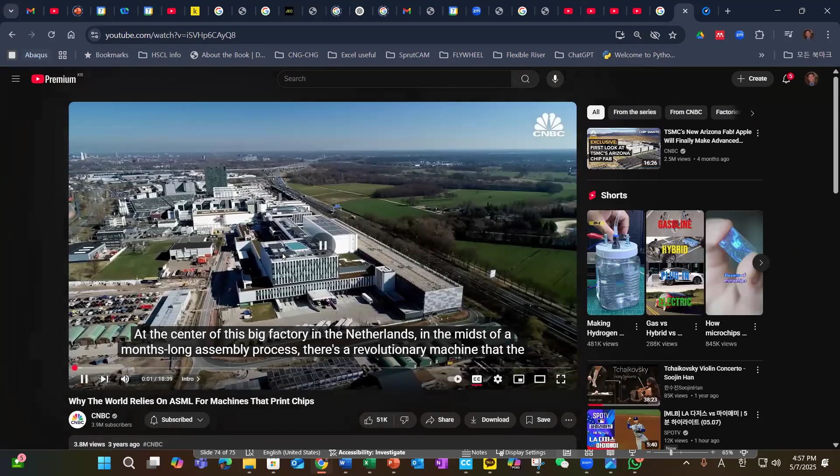As mentioned here, one of the reasons why Toyota is working on this hydrogen combustion engine is that Toyota is kind of a slow adopter of electric vehicles. It's much slower than other companies. So they were working on this hydrogen combustion engine as an alternative.

So we can see that a lot of companies have a different background, different direction, but the point is that they are all making the same types of effort, moving toward what would be the most ideal, most economical, most eco-friendly transportation system. So they do a lot of research. All engineers are working together and putting all their energies in with very ambitious

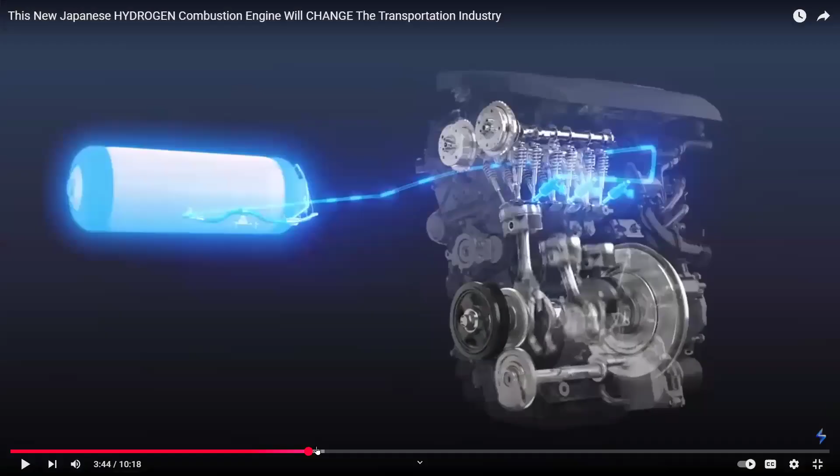motivations. So we are certainly part of them, working together, not just inside Korea, but as a global movement. If you are interested in Toyota hydrogen combustion engines and working on that, well, why don't you apply to Toyota in Japan or global locations? So I'd like to emphasize that all these kinds of effort are not inside one company, not inside one country. It's a global trend.

So I hope that you can contribute to this effort, and in return, you can play a very important role in this society, and that's what engineers need to do.

Okay, well, these are all the topics I'd like to cover today. Again, the review of the fuel cell and review of the hydrogen combustion engines, and I hope that you got some new motivation at least.

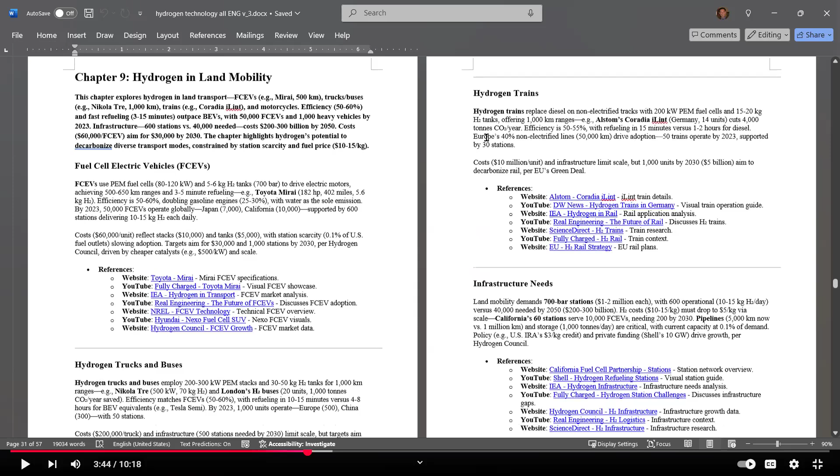Basically, we're not going to cover all the chapters listed in this overview, but you can get the most important idea. And next one, as you can see, hydrogen in land mobility: rather than just passenger vehicles, there will be hydrogen trains, hydrogen trucks and buses, and the infrastructure.

Infrastructure is the fuel system. This is much needed. And also hydrogen for air and sea mobility. You can contribute to these types of industry where they need to apply hydrogen for air and sea mobility.

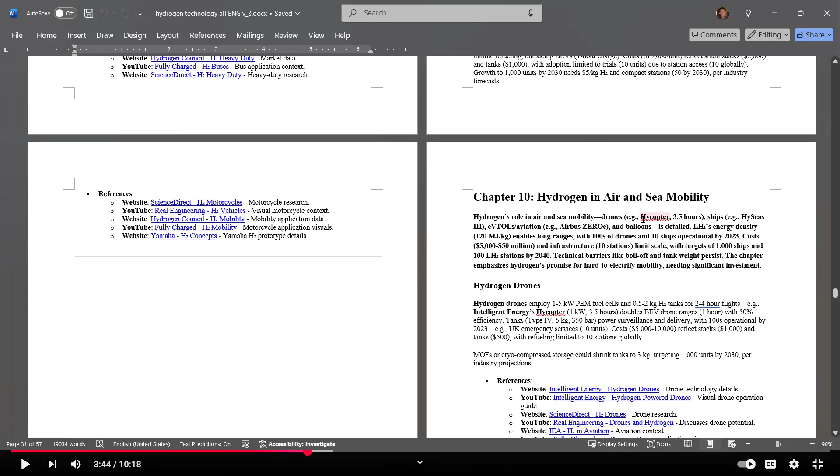And speaking of this, one of the key applications is the eVTOL or UAM, led by Hyundai. Hyundai's future product they are investing in right now is the eVTOL. They call it AAM, and secondly, they are working on the humanoid.

Okay, I would like to close this. Let's see. AAM and Hyundai Motor Group. Hyundai Motor Group is introducing the advanced humanoid,

and the reason I'd like to emphasize this humanoid is that every humanoid also needs an energy power system as a unit of energy storage inside, and I'm sure that there will be some battery. So half of this total system can be a battery, and there are a lot of motors in there. So you can think of many different types of energy storage, even hydrogen; electricity can be thought of.